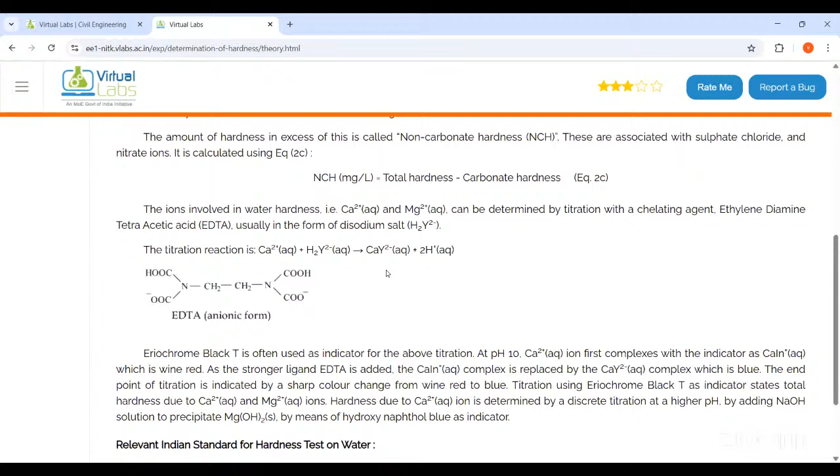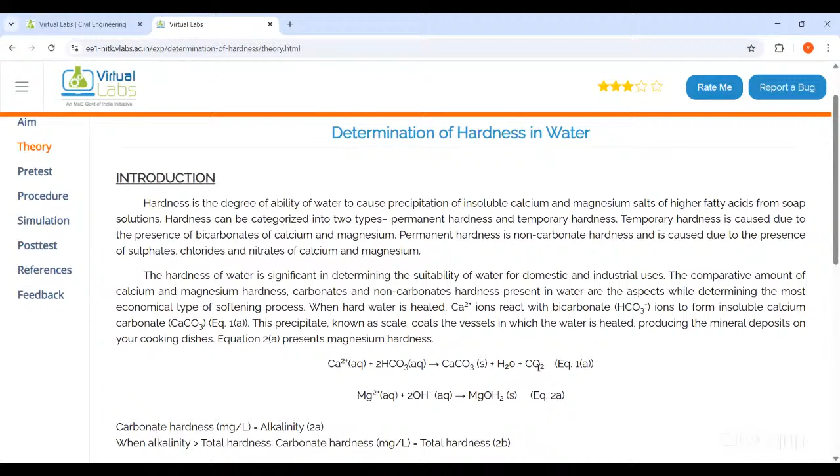Theory explains what hardness is. Usually there are two types: permanent hardness and temporary hardness. Temporary hardness we can remove by boiling the water, whereas permanent hardness requires other methods. These are the reactions involved during this titration method. What is the name of EDTA? Why do we use Eriochrome Black T as an indicator for this experiment? We also use a specific IS code for this experiment. Theory explains about hardness, types of hardness, and reactions involved during the experiment.

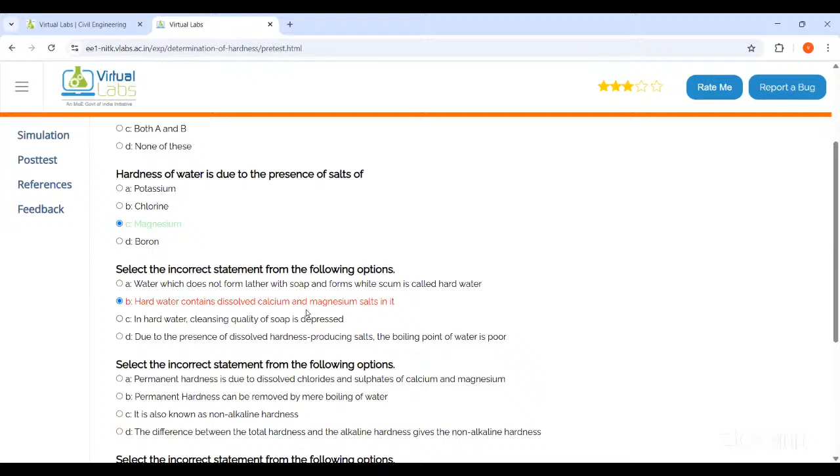Next is the pretest. Based on the theory, there are some multiple choice questions. Students have to answer these and then submit. Their score appears here, correct answers appear in green color, and wrong answers appear in red color.

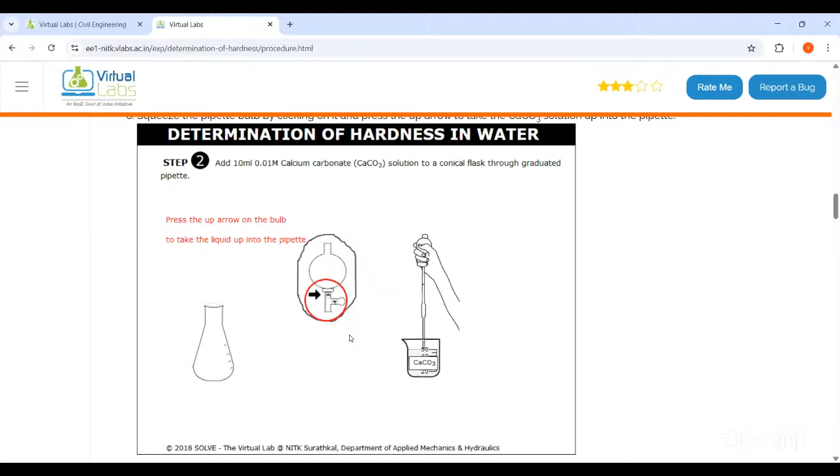Next is procedure. These procedure steps will be followed on the simulator - how to arrange the experiment, what solutions we are using, everything is explained in this procedure part, along with calculations and how to make the tabular column.

Next is the simulation part, which is same as how we do the experiment in the lab. First is the objective or aim: to determine the amount of total hardness present in a given water sample by EDTA titration method. Apparatus used includes pipettes, conical flask, burette, beaker, dropper, etc. Solutions used are ethylene diamine tetraacetic acid, known as EDTA solution, water sample, calcium carbonate solution, ammonia buffer solution, and Eriochrome Black T as indicator.

The description is about the hardness of water. Hardness is defined as a measure of the ability of water to cause precipitation of insoluble calcium and magnesium salts of higher fatty acids from soap solutions. There are two types of hardness: temporary and permanent. Temporary hardness is the presence of bicarbonates of calcium and magnesium. Permanent hardness is the presence of sulfates, chlorides, and nitrates of calcium and magnesium.

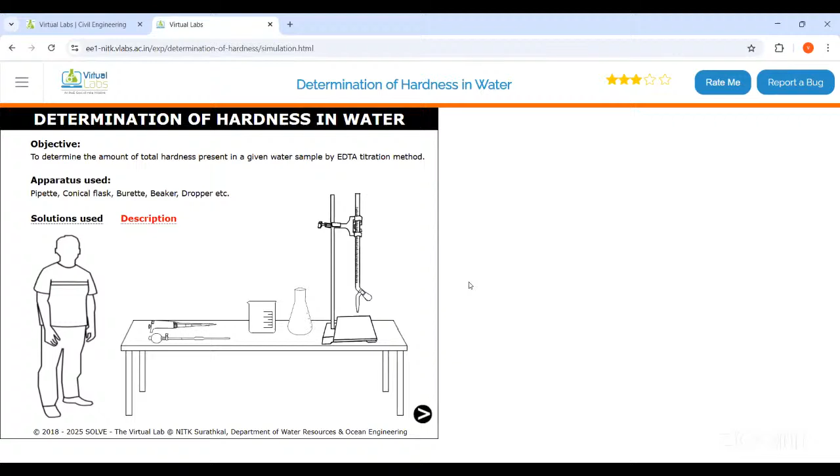This is the setup of the instruments, which are used for this particular experiment. First, we have to do standardization of the EDTA solution. In any experiment, standardization of the solution is important first. So let's see how to do the standardization of EDTA solution.

First, we take EDTA solution in the burette using a funnel. Pour the EDTA solution into the burette up to the 0 mark, close the bottle. The solution level is up to 0, but the measurement is at the lower meniscus. One more important thing - you have to remove the funnel. Sometimes students forget to remove the funnel and do the titration like that. So you should give the instruction that the funnel should be removed from the burette.

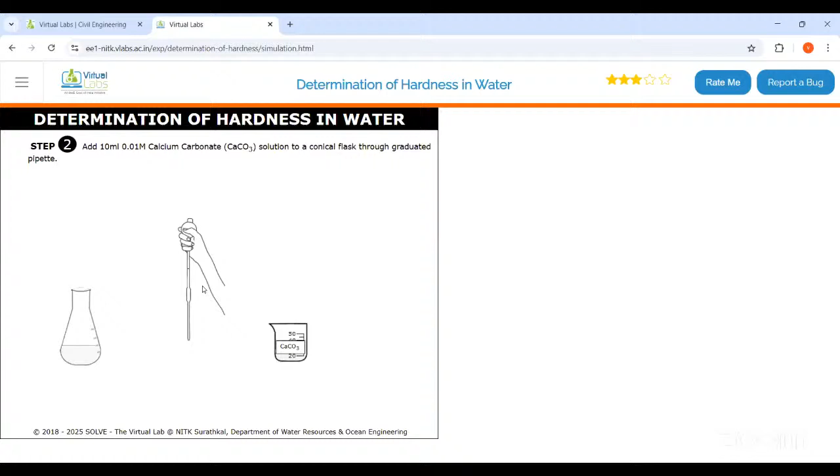Next, we add 10 ml of 0.01 M calcium carbonate solution to a conical flask through a graduated pipette. Click this button to fill the solution in the pipette, and click the down arrow button to release the solution. Next, we add ammonia buffer solution to remove the interference of particles - 1 ml of ammonia buffer solution to the conical flask.

Meanwhile, there are a few viva questions that will appear during this experiment. Why is ammonia buffer solution added to the sample? It is to remove interference and also to maintain constant pH. Next, we add 3 to 4 drops of Eriochrome Black T indicator.

After adding the indicator, the solution color turns to brick red or wine red. Now titrate this solution again with EDTA solution.

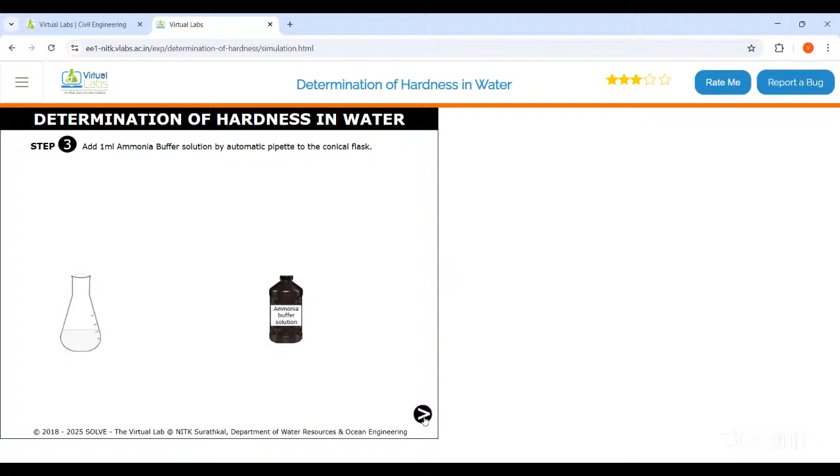After that, add the indicator, Eriochrome Black T, 3 to 4 drops. After adding the indicator, the solution color turns to wine red or brick red.

Now titrate the EDTA solution till the color changes to blue. To start the titration, open this knob, and continue titration until the color changes to blue, then stop by closing the knob.

Note down the final burette reading. Here is one of the simplest viva questions: titration is carried out until the sample changes its color from wine red or brick red to blue.

Now make the tabular column and note down all the observed values. We find total hardness using the formula A into B into 1000 divided by C, where A, B, and C are all explained.

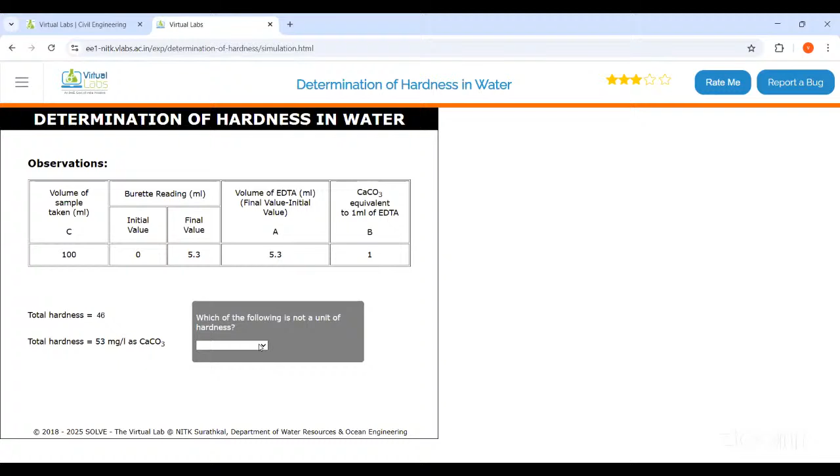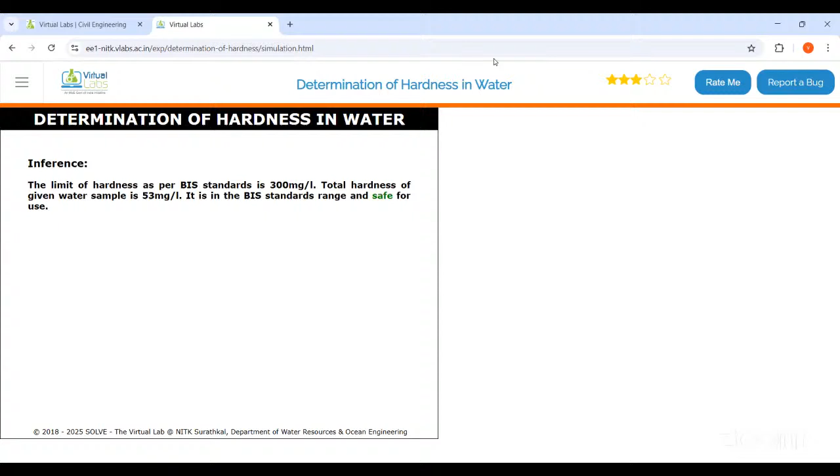The limit of hardness as per BIS standard is 300 milligram per liter - that is true. So the inference is: the limit of hardness as per BIS standard is 300 milligram per liter, and the total hardness of the given water sample is 53 milligram per liter, so we can use it, since it is within the safe range.

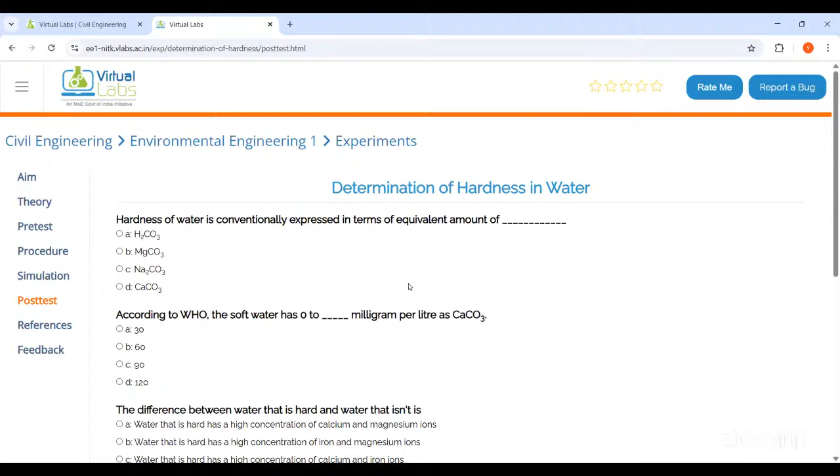After the simulation, again post-test questions are there, which are a little more advanced than the pre-test questions. Students have to answer, click the right answer, and submit using this link. The correct answer appears in green and the wrong answer appears in red.

Next are the references. There are two links: one is simulation demo and the other is experimental demo.

The simulation demo is the same as what I showed in this part, but it has voice narration. The experimental demo shows how we can actually do it, so that students understand it better.

These are the references and the contributors list. Again, the feedback section - after using this, you can share your suggestions so that we can improve it.

Similarly, another important lab in civil engineering is the transportation engineering lab. Here also there is introduction, objective, list of experiments, and target audience. Total 8 experiments are there, and this lab is useful to both UG, PG, as well as diploma students.

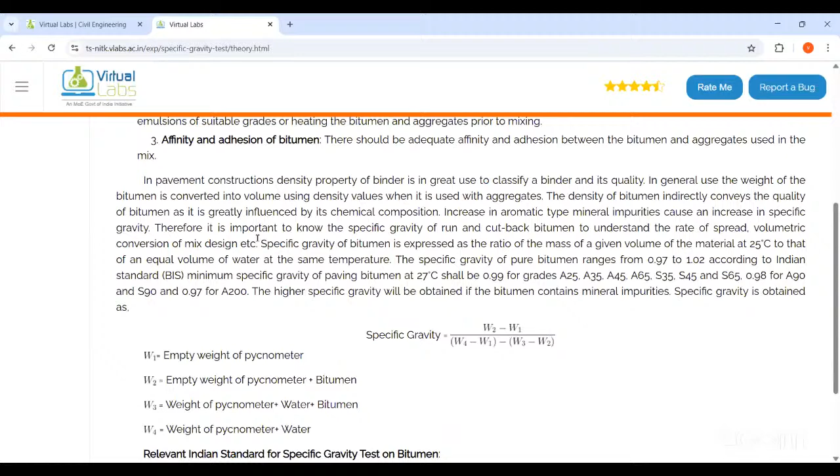These are the specific properties, and also how to calculate the specific gravity using this formula, where W1, W2, W3, and W4 are all explained. For this, we used this Indian Standard Code Book.

After explaining the theory, there are a few multiple choice questions which the students have to answer. Next is the procedure - these procedure steps will be followed on the simulator.

Next one is simulation. This is one of the simplest experiments. The objective or aim is to determine the specific gravity of the given sample of bitumen.

Apparatus used: specific gravity bottle, also known as pycnometer, weighing balance, and distilled water. Specific gravity of bitumen is defined by Bureau of Indian Standard as the ratio of the mass of a given volume of the bituminous material to the mass of an equal volume of water, with temperature of both specified as 27 degrees centigrade.

This is the setup. First, we take a clean and dried specific gravity bottle, weighed along with stopper, that is W1. Now we turn on the weighing balance and make it zero by clicking this tare button. Then keep the specific gravity bottle on the weighing balance and it shows the weight of the bottle, that is W1.

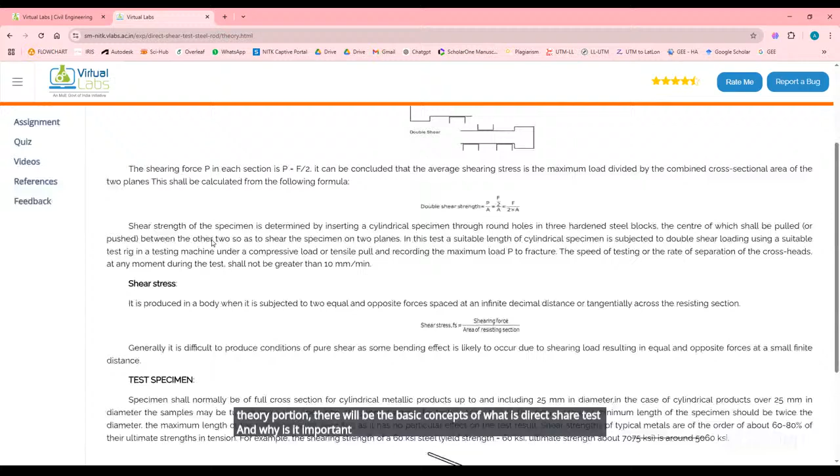As already explained, we have the theory portion, which covers the basic concepts of what direct shear test is and why it is important, along with any IS codes that we have to refer to.

Next, moving on, we have the procedure tab. This is a familiarization tool so that people completely new to this web page get a good idea of what they have to perform inside the simulator. As you move down, you will be shown the various steps you have to follow in order to move forward in the simulation.

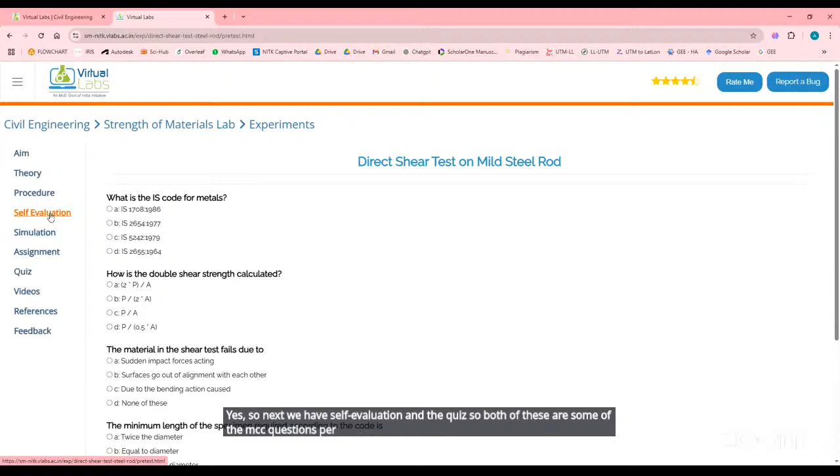Next we have self-evaluation and quiz. Both of these contain MCQ questions pertaining to the particular experiment in question, so here all the questions will be related to the direct shear test concept itself. Students can answer these questions to gain more knowledge and get an idea of their level of understanding of the subject.

Next, here we have our simulation window. I've already spoken about the quiz and self-evaluation. So next, one more important feature of this VLab is...

We have something called the experimental demo video and simulation demo video. These are videos developed under Lagu paTa, an initiative by CST and NIT Surathkal. Along with the procedure tab, which has a pictorial representation of how the simulation is going to look and how you will perform the experiment, in the videos tab we have two demo videos.

One is the simulation demo video, which gives a detailed video description of how this particular experiment has to be conducted. We also have an experimental demo video, so if the student wants to know the practicality of the experiment, or look into how to actually conduct it in a physical laboratory, they can look into these demo videos.

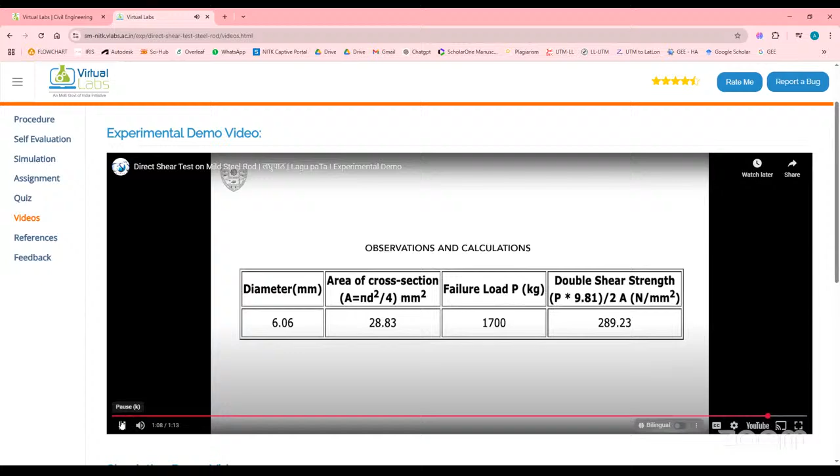Let's look into both of these videos to get a better idea. So if I just click on it, the video will play, showing each and every step that we have to follow. So this is the experimental demo video.

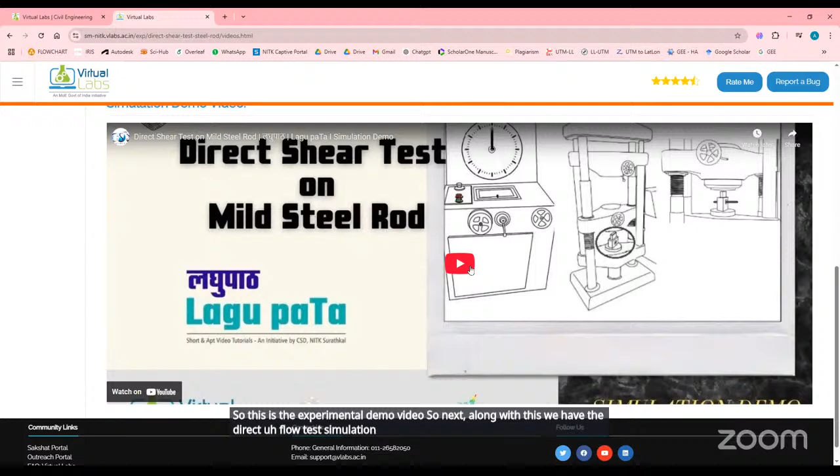Next, along with this, we have the direct shear test simulation demo video as well. Let's quickly look into that too. Just by looking at this video, we'll get a pretty good idea of what we have to do in the simulation.

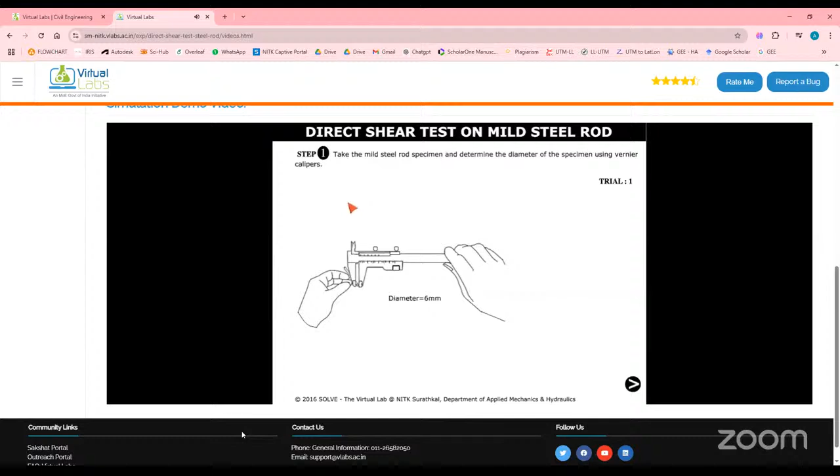After the setup is done, we have to click on the next button and start the experiment. Wait until the specimen fails, note down the failure load, and stop the experiment. That is for trial 1. Similarly, we'll have to do 2 more trials for the same experiment.

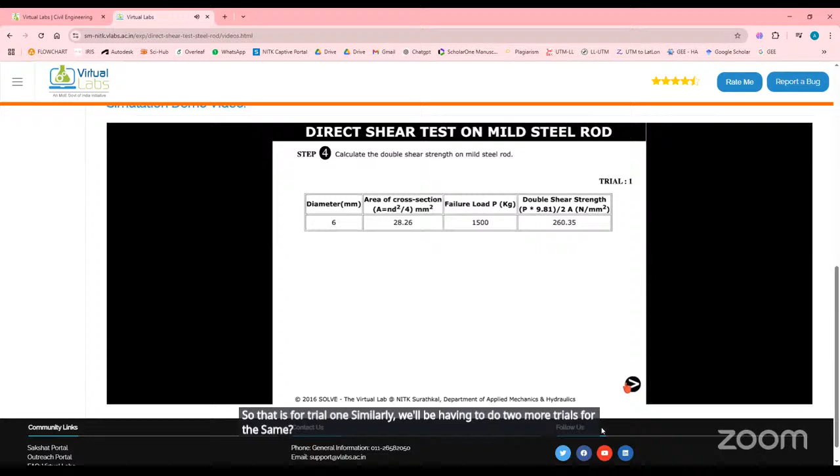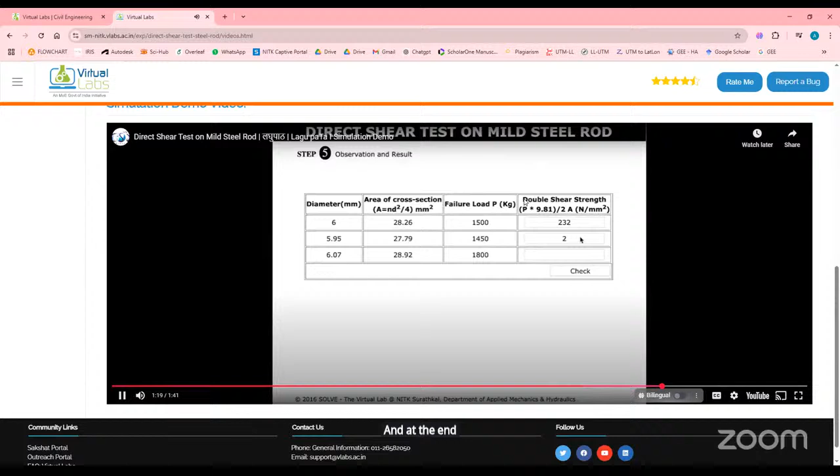When you click on the next button, we'll get 2 more trials of the same kind. At the end, after the 3 trials, we'll have to calculate the different double shear strength values. That is the complete experiment we will be doing in the simulator.

Now let's directly move on to the simulation. Once I click onto the simulation, all the other parameters of the web page get hidden so that all concentration goes onto the conduction of the experiment. First we will be shown what the objective is and what apparatus are used.

So now, even inside the simulator, we will be having some guidelines which will help us to do the simulation.

Here we have a written guideline telling me to take the mild steel rod specimen and determine the diameter using the vernier calipers. I can see I have a vernier caliper and they have also provided a rod, the mild steel rod specimen. There is a guiding arrow telling me that I have to click on this particular point.

When I hover over the specimen, my cursor changes to a hand icon, which tells me that this is the correct place to work on. Any other place I click is not going to work, other than simply clicking on the specimen rod.

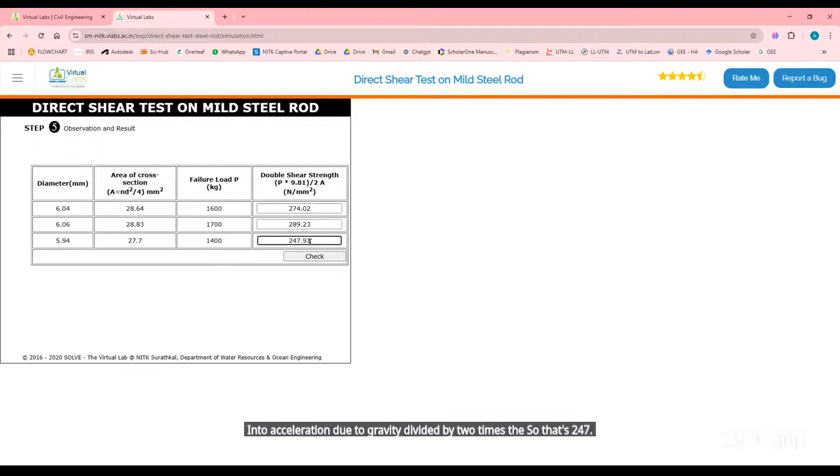So that's 289.23 and 247.91. Let's see if the values I calculated are correct or not. Okay, so now we can see there is no percentage of error. So here also the students can understand if they are going wrong in any part of the calculation.

So if there is any mistake, they'll be able to find out the percentage of error that I have conducted. And then finally, what is the average double shear strength? That is the average of all the 3 values taken in the experiment. So that's about the simulation part of this particular experiment.

I hope you're able to understand the importance of virtual labs in this situation. Most students, by the end of the semester, will not be able to completely recollect the way to conduct the experiment, or there will be many practical problems allowing students to get into laboratories and conduct these experiments. Instead, students can always come onto this platform, look into the experiments, and get a better idea of how this experiment works and what steps are needed to understand the concept.

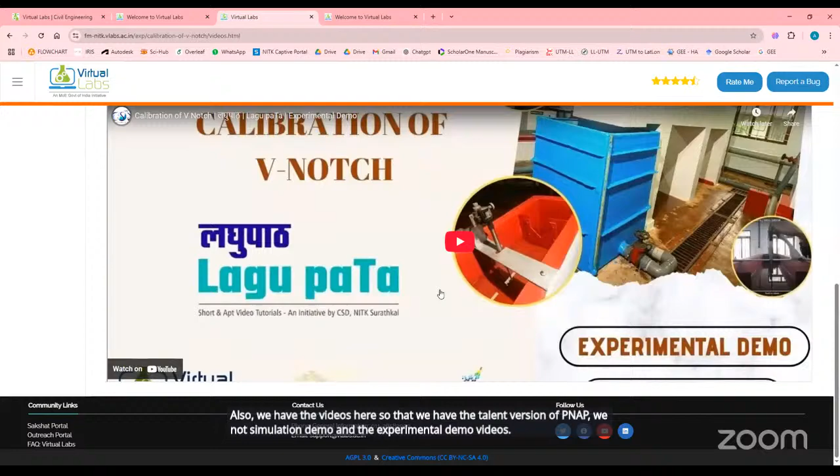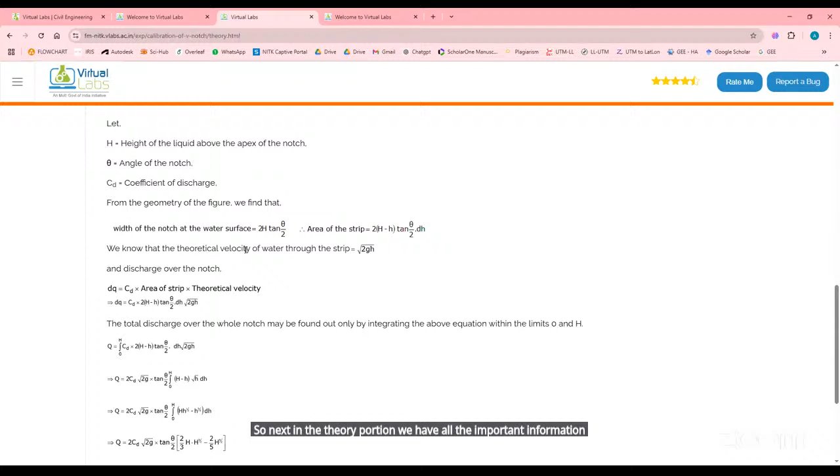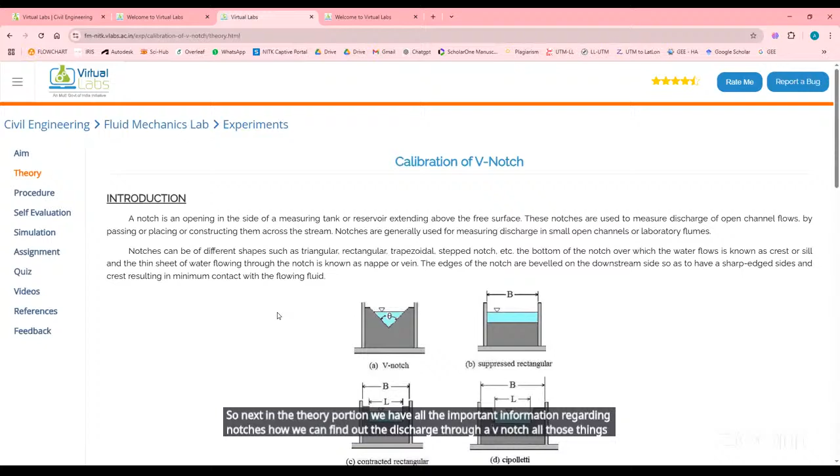So now let's dive in. In the theory portion, we have all the important information regarding notches and how we can find the discharge through a V notch. All those things have been mentioned here. Again, in the procedure, we also have the pictorial representation.

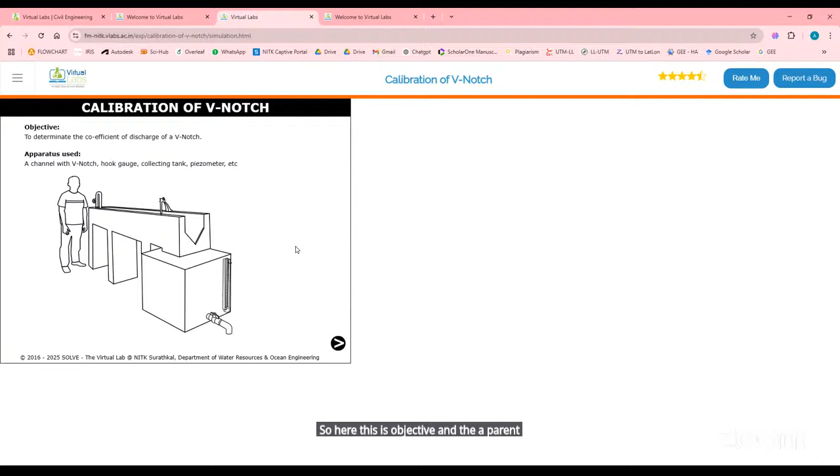Now let's conduct the experiment of calibration of the V notch. Here is the objective and the apparatus used. Now here also we have written guidelines telling us what we have to do in the various stages of the experiment. First we have to start the machine and move on to the next step.

Now we have to open the inlet valve and allow the water to fill into the channel till the crest level. The crest level is nothing but the bottommost point of the V notch. Let's do that and move forward.

Now we have to find the total head of water to get the theoretical discharge of the V notch. Here we have 10.04 minus 3.15 centimeter, so that's 6.89. Let's check if it's correct. Okay, now we have the theoretical discharge value.

What we have to calculate is 8 by 15 root of 2g into tan theta by 2 into h to the power 5 by 2. The parameters to substitute are acceleration due to gravity as 981 and theta as 90 degrees. As theta is 90, theta by 2 will be 45, and tan 45 will equal 1. H is the head of water, that is 6.89 to the power 5 by 2, which is 2.5. Then we have to substitute this value. For the time being, I'll add some arbitrary value and let's check.

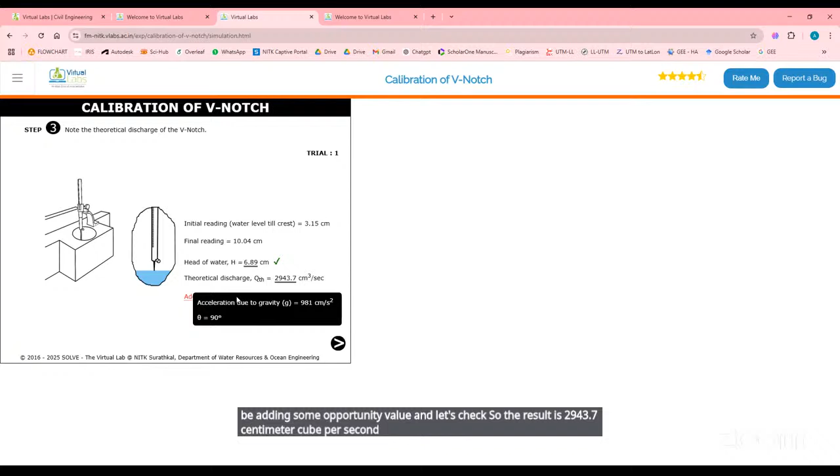Now similarly, we'll move forward and find out what is the actual discharge. Why are we finding this? We are finding theoretical discharge and actual discharge to find out the coefficient of discharge for this particular notch. So we'll be noting down the time required to fill 10 centimeter.

So here we have area of the tank as 3500, into h is 10 centimeters, divided by time taken which is 20. So here it's 1750. Let's check it. That is right.

We'll move forward. So now here, these are the observations. And now we have to find out what is the coefficient of discharge. So coefficient of discharge is nothing but Q actual divided by Q theoretical.

So that is 1750 divided by 2943.7, and the value comes out to be 0.59. Let's check it, and that's right. So this is for trial 1.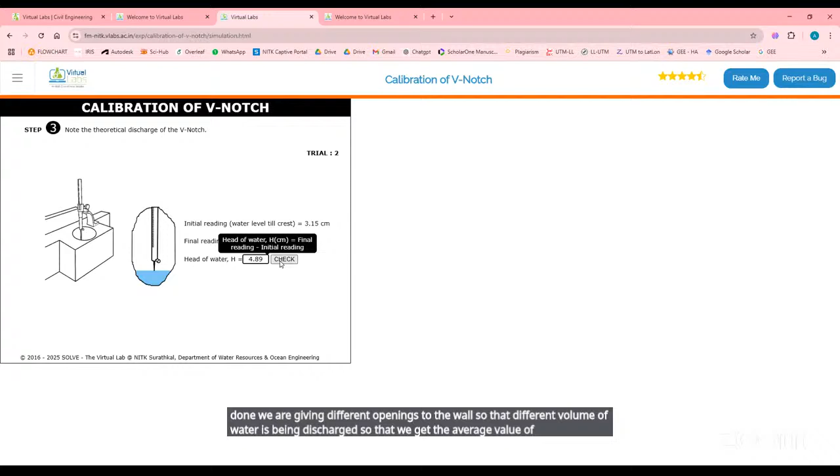The same steps have to be followed for trial 2 as well. So we'll be noting down the head of water that we are providing. This is done so that we give different openings to the valve, so that different volumes of water are discharged and we get the average value of coefficient of discharge. So again, now we have to find out what is theoretical.

So what we have found is H equals 4.89. 4.89 to the power 5 by 2, that is 2.5. Into what are the other parameters? Into 8, divided by 15 into root of 2 into 981.

So now again we'll be calculating the actual discharge. Here we have area of the tank 3500 into height of water is 10, divided by the time taken is 44.6. So here, 784.75. Let's check it. Yeah, 784.7 is the correct value.

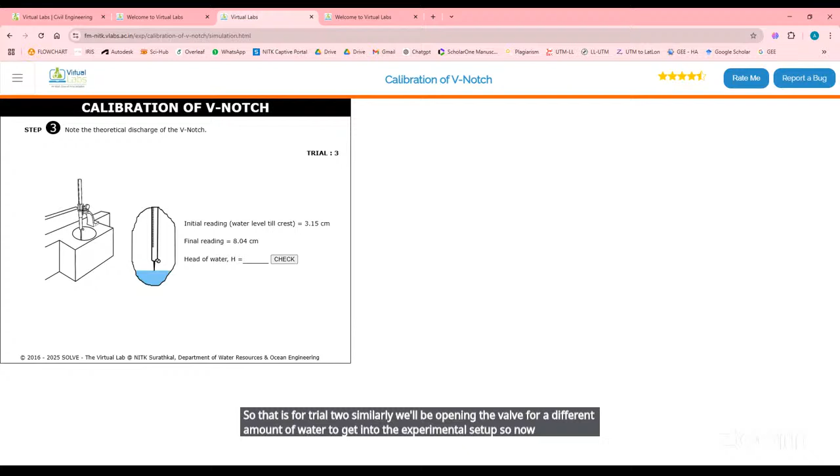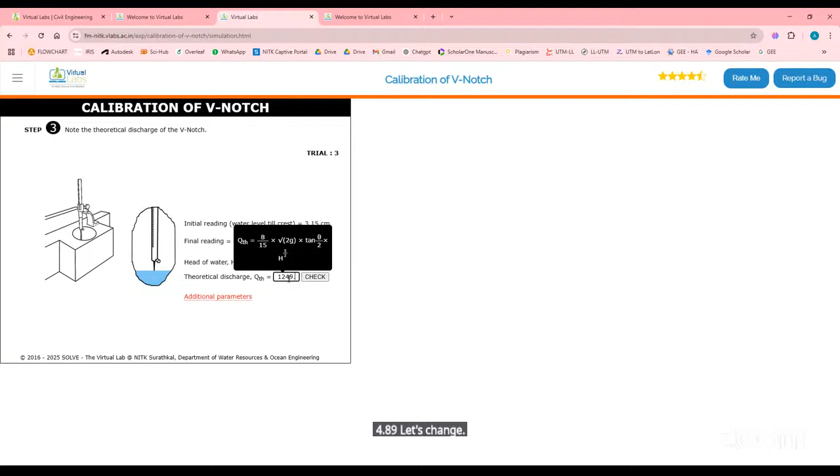Similarly, we'll be opening the valve for a different amount of water to get into the experimental setup. So now final reading is 8.04, so that's again 4.89. Q theoretical will be 1249.1. And now again, what is the time required to fill it for 10 centimeter height? 6.

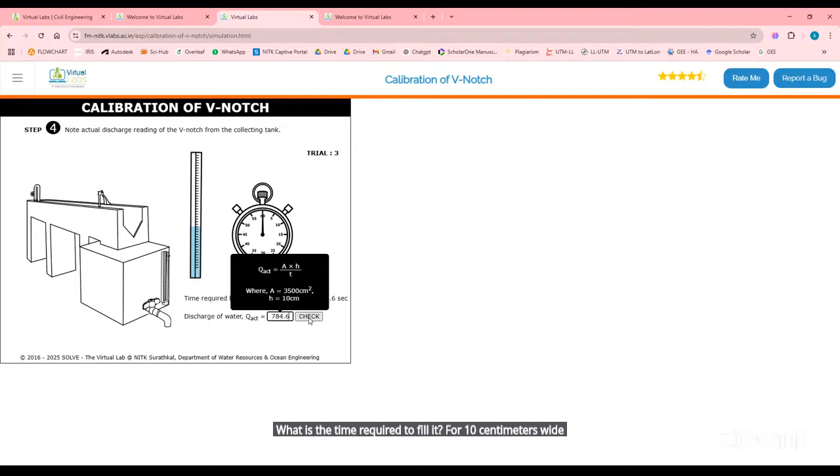So now again we have to find out Q actual by Q theoretical, that is coefficient of discharge, 0.62. And check it, yes. So now we have done the 3 trials, so now we'll stop.

So again, in the references section, you'll be having what textbooks or journals have been referred to for the development of this lab, and also the contributors list. So now moving forward.

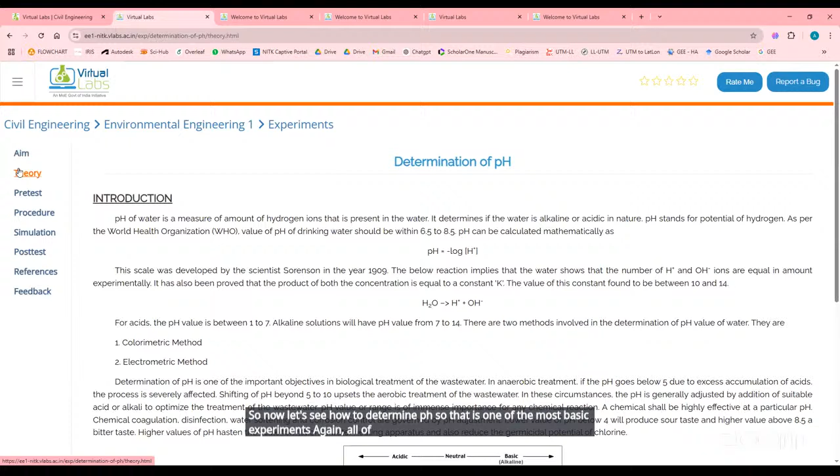So now let's see how to determine pH. That is one of the most basic experiments. So again, all of the parameters are the same. There is theory. Something in the older labs was they had something called self-evaluation, but now that has been renamed as pre-test and post-test. Though the major goal of the pre-test and post-test remains the same.

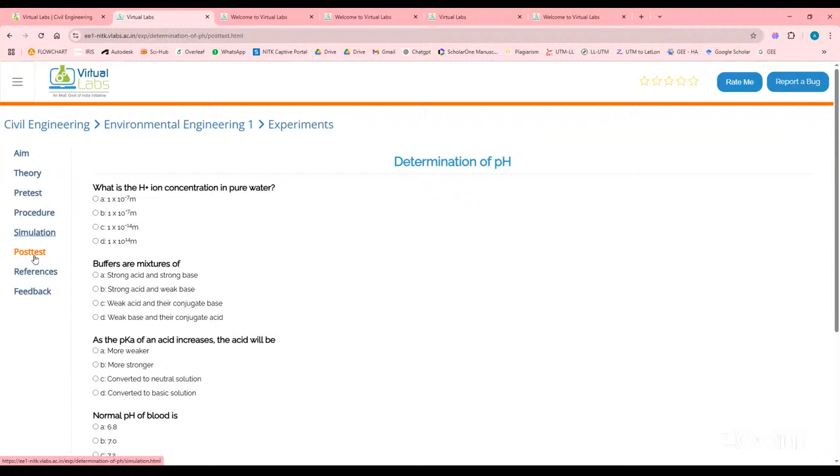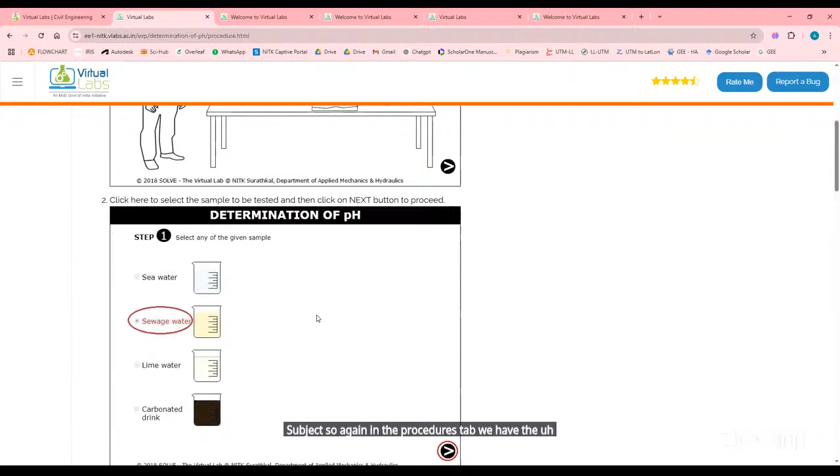So the students can answer these questions and get a better knowledge regarding their subject. So again, in the procedures tab, we have the pictorial representation of what we have to do inside the experiment.

So now let's move on to the simulation.

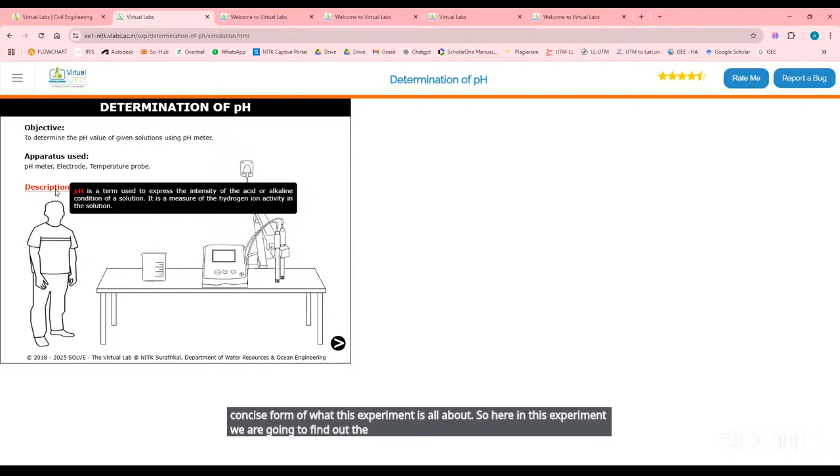But in the description tab, we have a very concise form of what this experiment is all about. So in this experiment, we are going to find out the pH, and it's telling us what pH is - a measure of hydrogen ion activity in any solution we are considering. So that's about the introductory page.

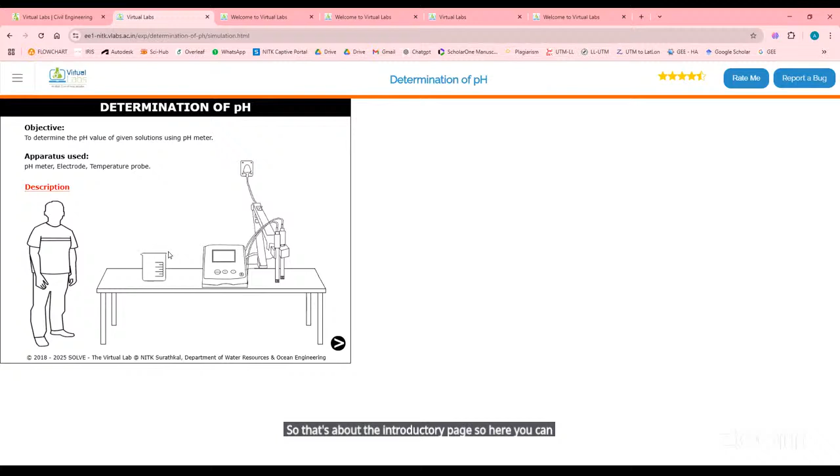Here you can look into the pH meter, the beaker, and the experimental setup. So first we have to select any one of the given samples. Let's select seawater and see how the alkalinity test, the pH test, has to be conducted.

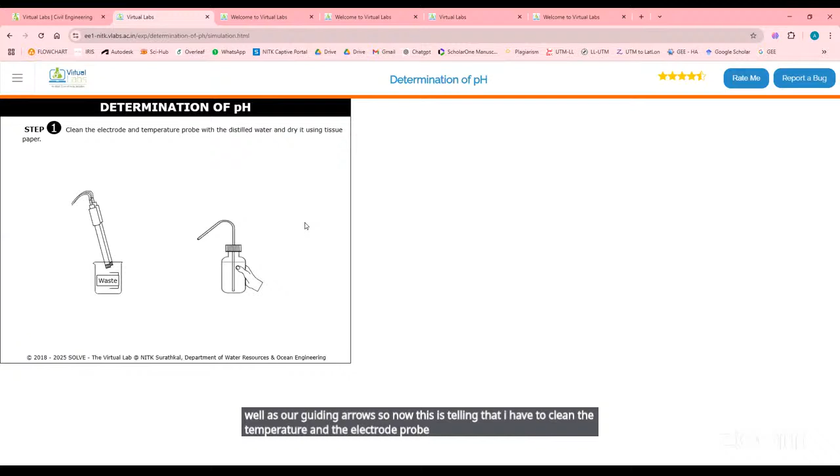Before finding out the pH of the required sample, we have to first calibrate the pH meter, following the same procedure. Inside the simulation, we have written guidelines as well as guiding arrows. This tells me to clean the temperature and electrode probe with distilled water and dry it using tissue paper. So this is my instruction - I'll click on the distilled water bottle and clean it.

Now it is cleaned with distilled water. Now we have to dry it with the tissue paper. When I give OK, this particular command will be executed. Okay, so now a pop-up question has come up on the screen.

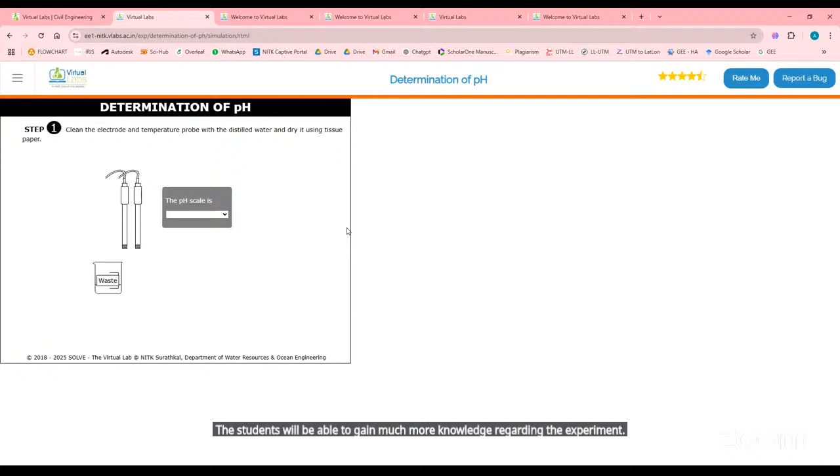These are called formative questions. In the newer labs, based on our experience and feedback, we have added these formative questions. The main idea of including formative questions is to make the simulation more interactive with students, and at the same time, students will gain much more knowledge about the experiment while conducting it. So without answering these formative questions, you will not be able to move forward in the simulation.

So for the pH scale, I have 4 options: is it a linear scale, an exponential scale, a logarithmic scale, or none of the above? If we had looked into the theory portion, we would have gotten the answer to this - it's a logarithmic scale. Okay, so now it allows me to move forward in the simulation.

Moving forward, the second step in calibration of the pH meter is to dip the electrode and temperature probe in buffer solution of pH value 7. We turn on the machine and dip our probes. Here the basic idea is we are going to give a buffer solution that is equal to or more than 7, and one more will be less than 7.

So another formative question has come up, and I have to answer this in order to move forward. Buffer solutions are used to calibrate pH meters because they resist changes in the pH. So that is true.

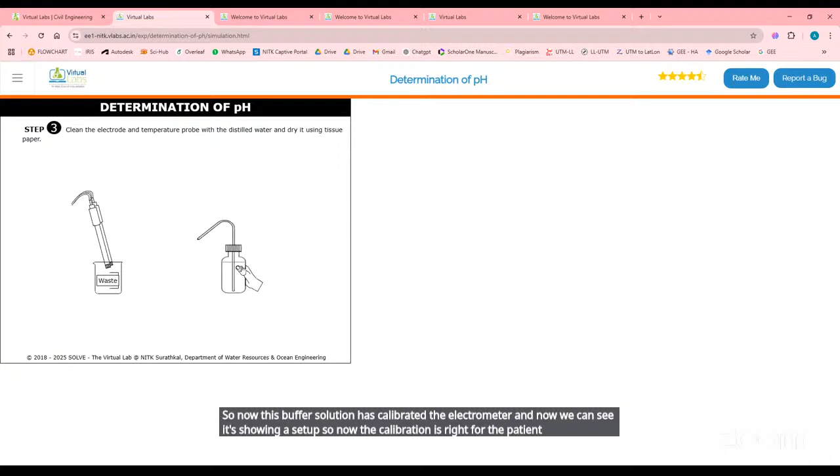Now this buffer solution has calibrated the pH meter, and now we can see it showing as 7. So the calibration is right for the pH buffer solution of pH 7. Now we again have to clean our electrode and temperature probe. Why is this done for each and every step? This is to make sure there is no discrepancy in the later values we are going to find out.

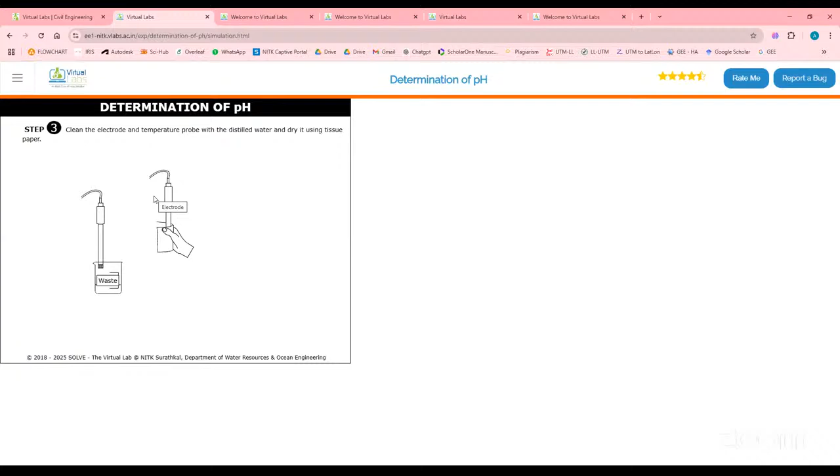So now we have another formative question. I hope you all understand that with the inclusion of formative questions, the simulation has become much more interactive with the students. So pH is a measure of hydrogen ions, oxygen ions, hydroxide, or carbonate - it's a measure of hydrogen ion.

So with this, we will be moving forward to the next step. Now we'll be placing a buffer solution of pH 4 and dipping our probes. Okay, so now the pH meter has been calibrated.

So that is done. Now we have to determine the pH value of the sample. So again, what we have to do is clean our probes - after each and every reading, this is the standard procedure we have to follow.

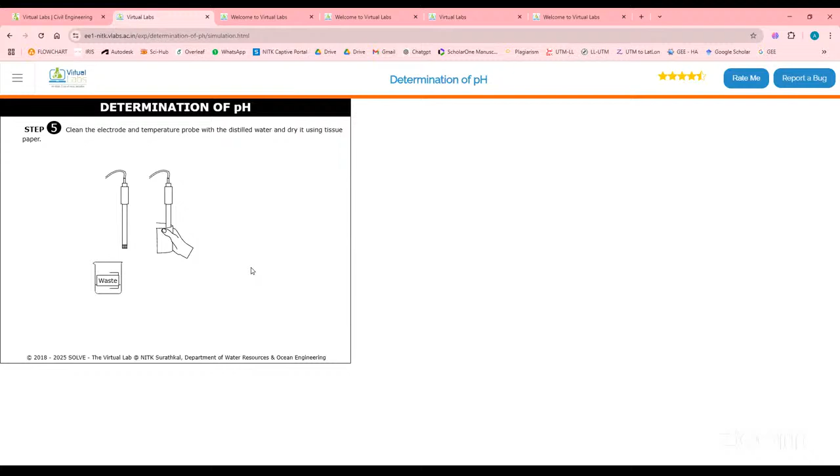So again, we have another formative question: what is the neutral value of the pH scale? That's 7.

Now moving forward, in step 1 we had selected our sample as seawater. So now we will be finding out what is the pH value for this sample. The pH of seawater has come out to be 8.3.

Now we have to answer this question: if the pH of seawater is 8.3, is it alkaline, neutral, or acidic? Whatever value is above 7 is taken as alkaline or basic. So the inference we'll arrive at is that if the pH is less than 7, it's acidic; if it's equal to 7, it's neutral; and if it's greater than 7, it's basic or alkaline in nature.

Yes, so that's about the experimental simulation for this particular experiment.

So again, we have another newer lab, that is advanced remote sensing and GIS. Most civil engineering students will not have much exposure to advanced remote sensing and GIS applications, so they can look into the various experiments provided here and get a very good idea of how these technological advancements are being used and how they can stay up to date.

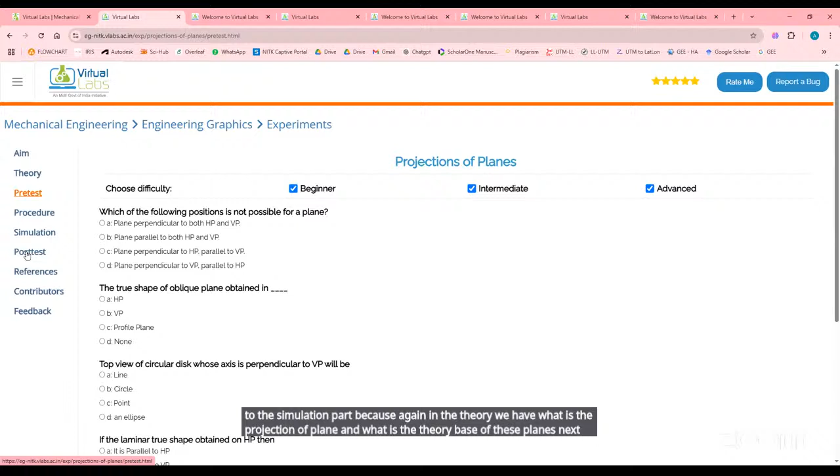Next, we have some pre-test and post-test questions regarding the plane topic itself. In the procedures tab, we have a detailed explanation of how each step is to be done, so let's see how we'll do this in the experiment. Then in the references tab, we have the references and the contributors list.

Now we'll move on to the simulation. What is our objective? The objective is to draw the projections of a pentagon of 25 mm side, having the surface inclined at 30 degrees to the horizontal plane with the side parallel to HP, and inclined at an angle of 60 degrees to the vertical plane. These are the three main values to remember: the side of the regular pentagon is 25 mm, the surface inclination to HP is 30 degrees, and to VP is 60 degrees. That is the main objective.

These are the apparatus we'll be using, and now we will move on to how we will conduct this experiment. The type of projection discussed here is related to the planes, so we have to answer this and draw our axis — here is our XY axis.

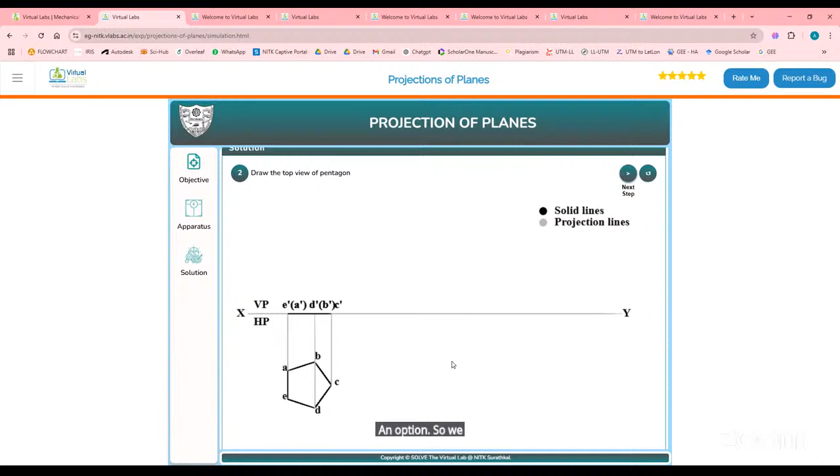Once this is done, we move to the next step. What is the inclination angle to HP? This was given in the question as 30 degrees. So we'll plot the inclined line, and on it we will place E dash, A dash, D dash, B dash, C dash.

Now, what is the color of the projection line? Here we can see the solid lines are in black and the projection lines are in gray. So just click on the right option.

Now we'll be projecting whatever is there on this VP inclined line to the horizontal plane. So now we have brought it back to the horizontal plane. We'll move on to the next step.

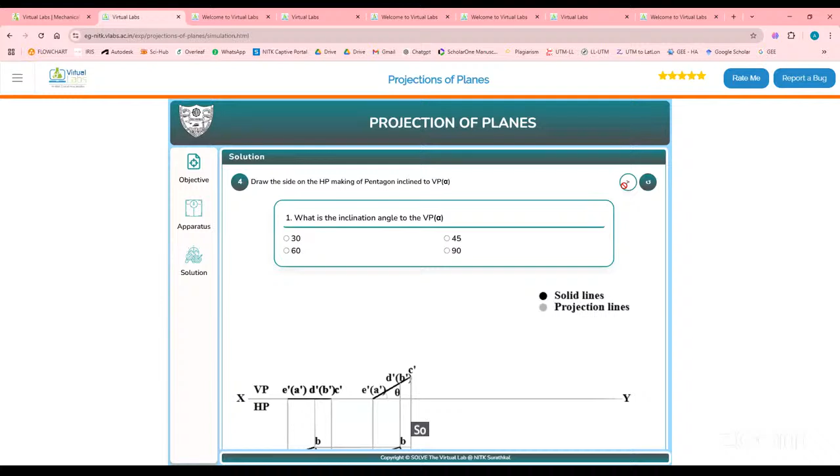What is the inclination of angle to VP? That's 60 degrees, which was given in the question. So we'll plot the side, and then we will transfer these points to this inclined line.

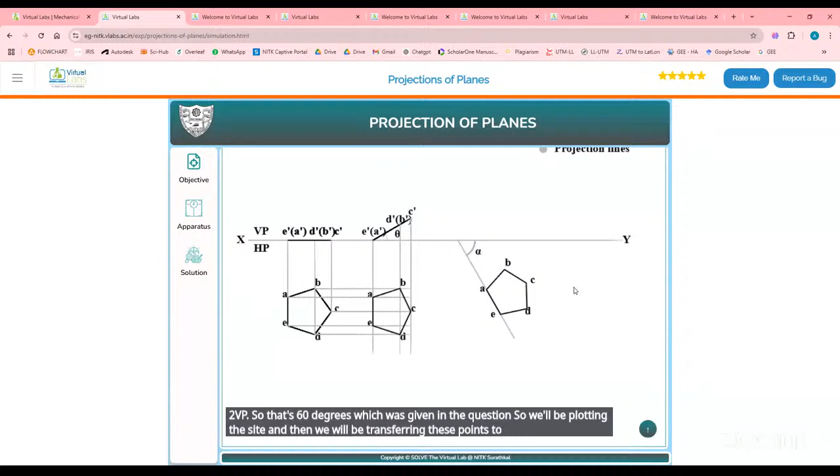And the next step, what are we doing? The top view, correct? The top view will be on the horizontal plane. So we will be projecting this plane up and bringing it here. So here is the front view.

So if a 25 mm side of pentagon is inclined at 30 degrees to the horizontal plane and 60 degrees to the vertical plane, this will be the front view and the top view that we get from this particular question. So the students can also get a very good idea of how they have to move forward in drawing these projections.

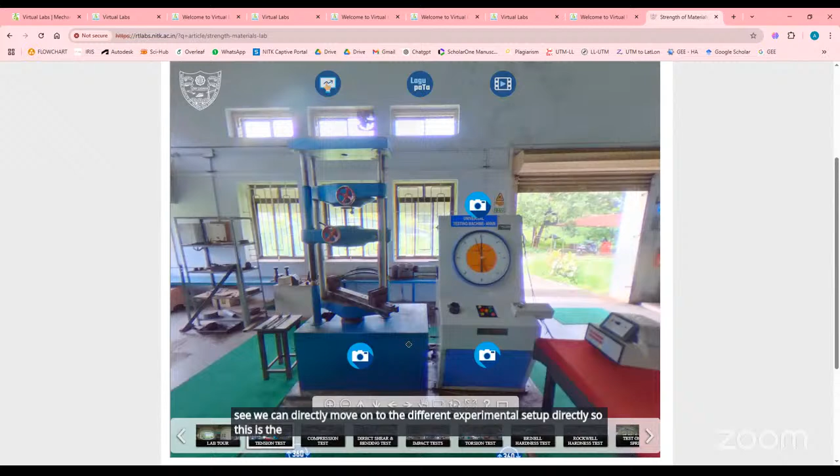So here is the lab that is there in NITK. When we scroll down, we can also directly move on to the different experimental setups. So this is the UTM machine.

Then we can go on to the direct shear test and bending test machine. This is the experimental setup that we had used for conducting our direct shear test experiment. And then we have the various impact test machines as well.

Along with this, you can also look around the laboratory in this manner. We can also directly go on to the different machines as well. Here again we have a high resolution image of this experimental setup.

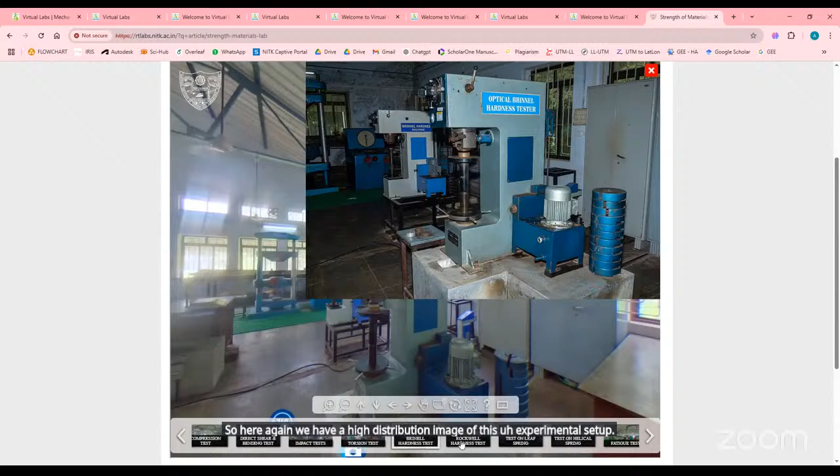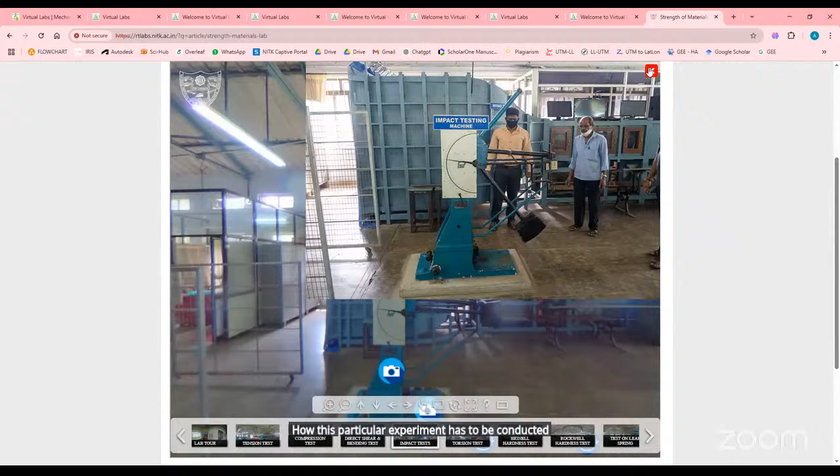So again, even in the impact testing, we have different options of how this particular experiment has to be conducted. And with this we have the instrument setup as well.

So similarly, you can move around and have a look at the various experimental setups. And again, we can look into the fluid mechanics lab as well.

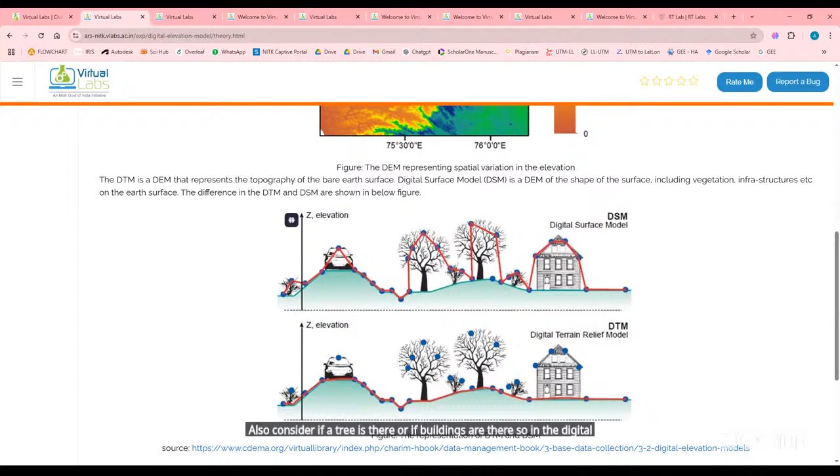So the DEM, in them again we have two types, that is DTM and DSM. DTM provides the features of only the ground. But DSM, that is digital surface model, also provides any extra things present on the ground. So if a car is there, then that one's height is also considered. If a tree is there, or if buildings are there. So in the digital surface model, all these data points will be available, but in the digital terrain model, only the ground features will be provided. So that is about DTM and DSM in the theory portion.

So again we have something as pretest, post-test, so that's the same things. And then in the reference section, you'll be having different reference material. In future, as this is a very new lab that has been introduced to VLab, the simulation demo and the experimental demo videos are yet to be up, but they will be uploaded very soon.

So let's move on to the simulation. Here the objective is to extract the topographical features and delineate watershed from the Shuttle Radar Topographic Mission data, that is the SRTM data. SRTM is nothing but a satellite that is providing this particular data. There are different satellite ranges as well, so you have SRTM, we have Landsat, we have different kinds of Landsat satellite data as well.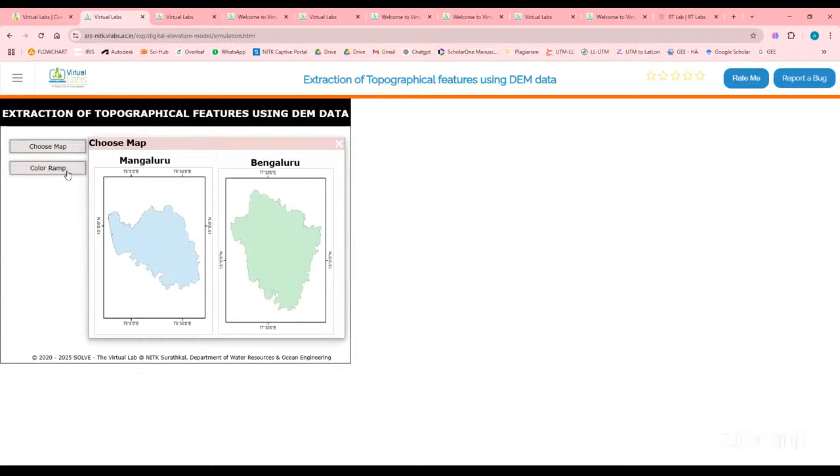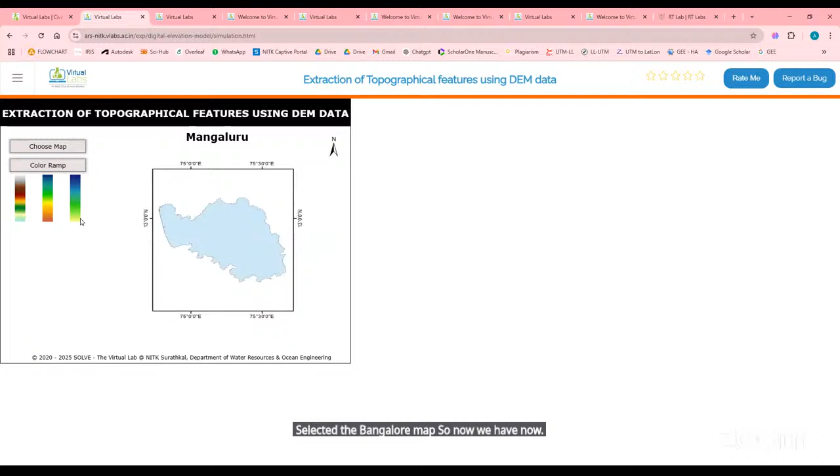So now here we'll be finding out different topographical features. Let's move forward and first choose the map. Now I have selected the Mangalore map. So now we have color ramp, let's choose this, and we'll click on the image to proceed. We'll take this as classified, or you can take it as stretched - these are the different symbology types, showing how you want to actually showcase your map.

So next we have elevation, we have slope, we have hillshade. Now we'll be doing the watershed delineation, using the elevation data. So this is the aspect. Now coming to watershed delineation, there is something called a stream network.

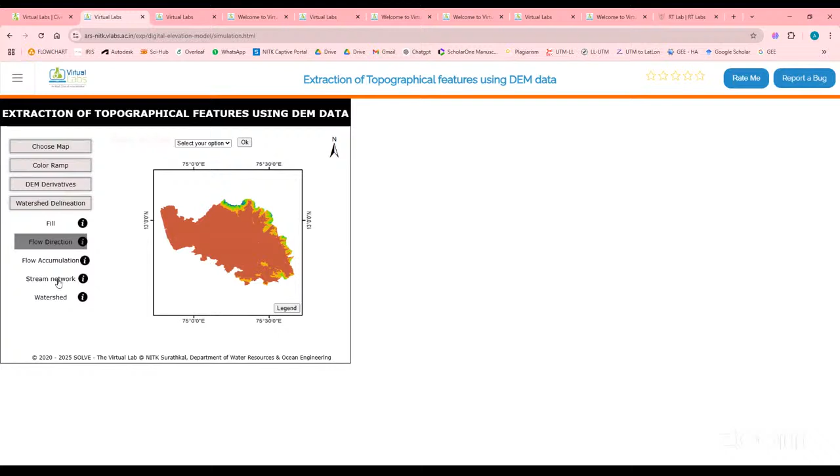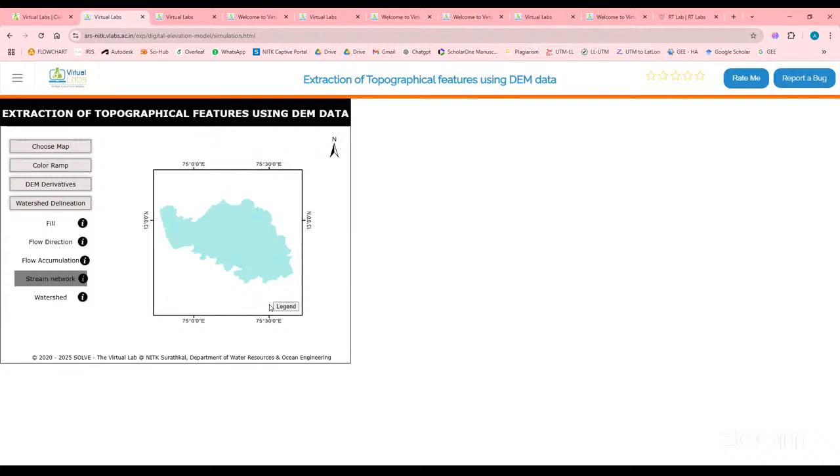Now let's do flow direction, this is the direction of the flow. We can also put in the legend, next, flow accumulation. Next is the stream network - we can tell what the stream network is, the points joining the lowest elevation, where our major river streams will be present.

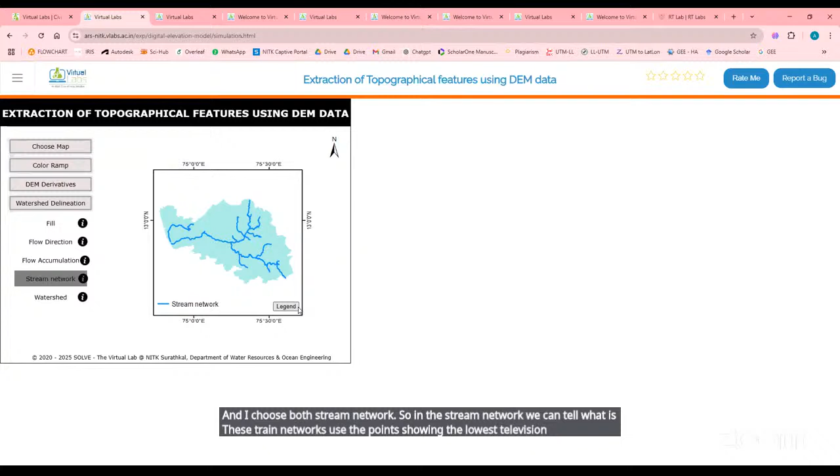Next we have the watershed. For the Mangalore region, we have two basins. Basin 2 is a major basin, and next we have basin 1, which is a smaller one, based on the elevation of the particular area. So that is about extraction of topographical features from the DEM data.

So here we can look into photogrammetry survey as well. We'll directly move on to simulation. Here first we have to unfold the antennas of our controller. So how many rotors are present in an octocopter? That's 8.

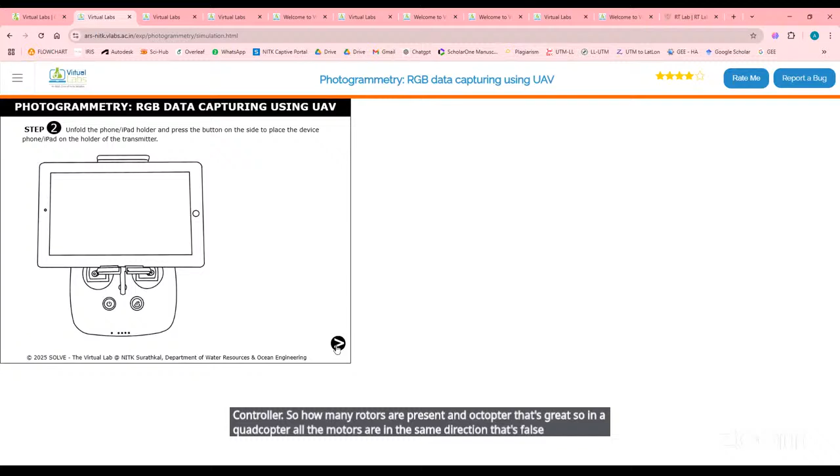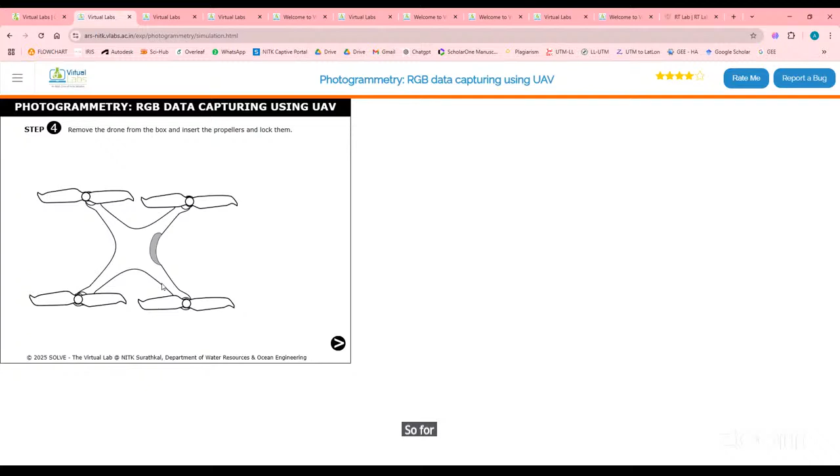In a quadcopter, all the motors are in the same direction - that's false. Now we will be connecting the remote controller and our tab. This is the drone setup, and we will be placing the propellers, 4 propellers onto the quadcopter, and we'll be placing the battery inside this.

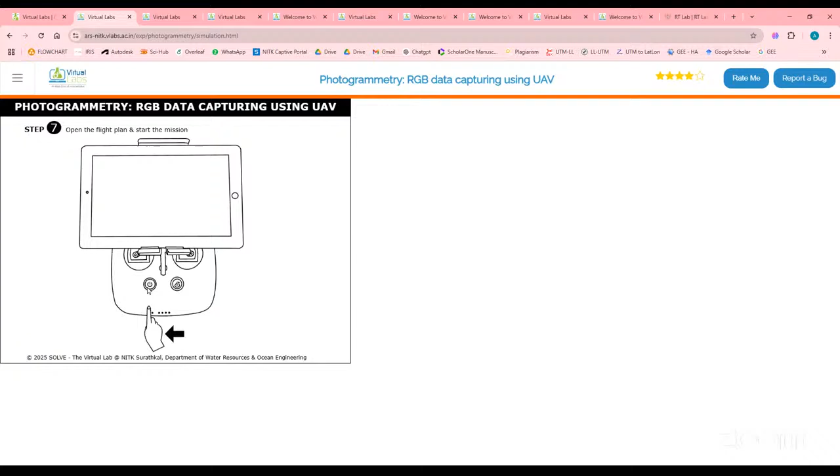So we have to unfold our landing pad, place our drone onto the landing pad, and make the instrument ready. Now next is to create a flight plan and start the mission. We will be flying, and you can choose the flying height. This is the total area that the survey will be conducted. Drone is set up, transmitter is set up, landing pad is placed, and we have also done the iPad work. Now we'll be starting the mission, and the drone will be flying onto this exact path.

To gain the photos - a total of 59 acres will be surveyed within a time of 15 minutes. Now once this is done, the drone will come back to our home position, and then after this we'll have to take out and upload. So now we'll be uploading our images.

So here is the orthomosaic map of this particular area. We also have the digital terrain model, and here it ranges from 6 meters to 12 meters, so it is a relatively flat ground. Now we have the digital surface model as well, so I think you'll be able to understand the difference between digital terrain model and digital surface model. In the digital surface model, you can see the difference is from 6 meters to 27 meters.

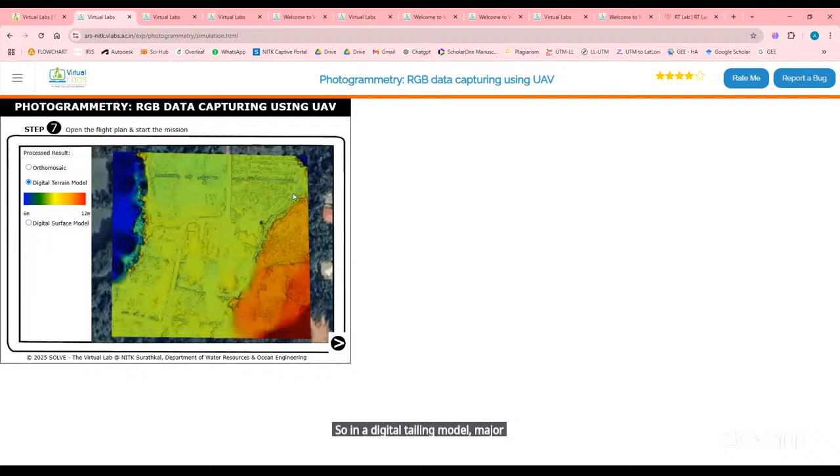The height of the trees, the buildings, if there is any bund or some farming going on, all those portions you can see in a digital surface model, whereas those points are not very much clear in a digital terrain model. So in a digital terrain model, only major ground features will be provided, but in a surface model, all your buildings, tree heights, have all been considered.

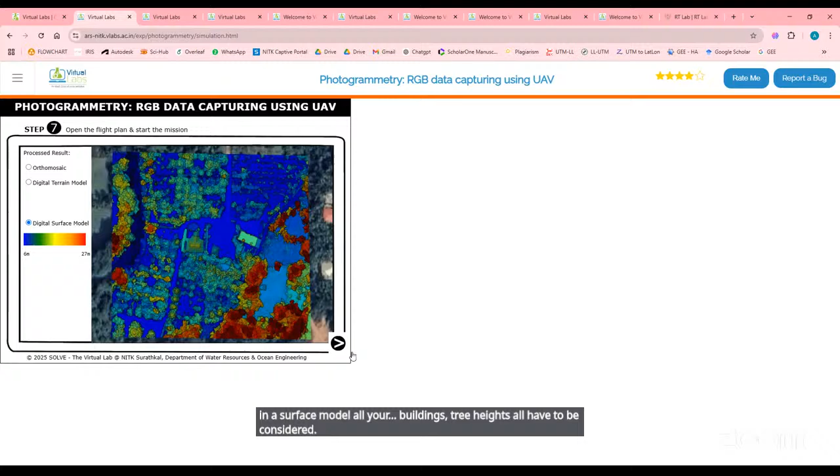Okay, so these are the observations. Depending on the flight height, the resolution of the orthomosaic map will change based on the GSD, that is ground sampling distance. As the flight height increases, we can see our flight time decreases.

Okay, so that's about the photogrammetry survey that we have to conduct.

Here there is also something called front overlap and side overlap. This is the amount of overlap that two successive images have during image capture. If the front overlap and side overlap are less, the stitching of the images will not be of great quality. So to get good quality images, we should have a minimum of 60 and 40, but in practical conditions we'll provide a minimum of 70% side and 75% front overlap.

So that's about one of the experiments in the GIS lab. That's all from my side for today. Let me stop sharing my screen.

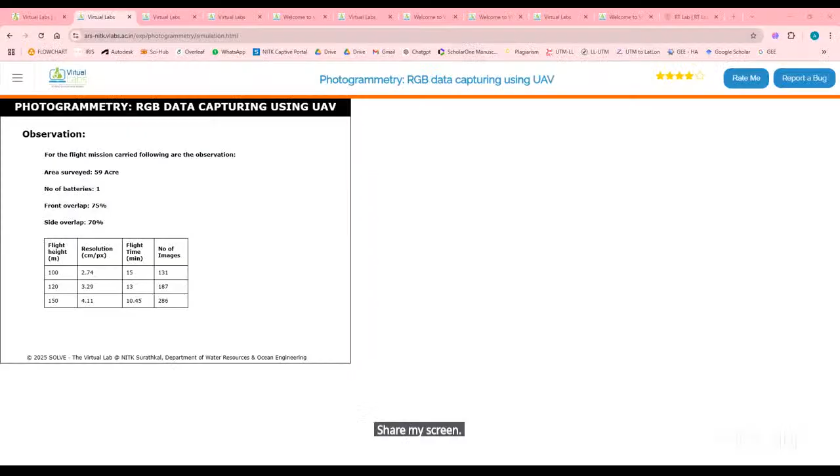So yes, going back to civil engineering, and I think it's in fluid mechanics itself. Moving directly to the list of experiments, we have impact of jet.

In this experiment, we have three options: flat vane, hemispherical vane, and inclined vane. Let's take any one and move forward.

Now we'll move the counterbalance weight to make the arm horizontal. We'll look at the bubble and make the arm horizontal. Once the balance is made, the length and weight of the counterbalance distance are measured using a scale. So now we have to measure the A distance and the B distance, and from that we'll be placing our weights.

Then we'll allow the water to flow in. Again we'll make our arm horizontal and move on to the next step. Now this jet is being directly applied to a flat vane.

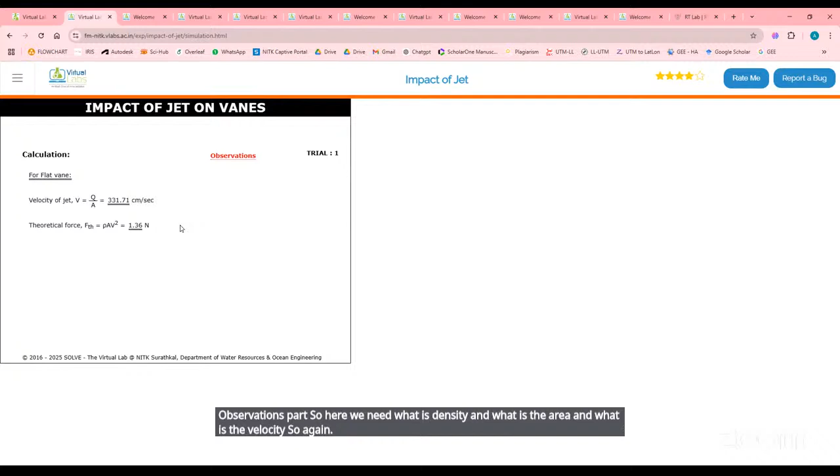Did some mistake there? Okay. So we can find out the coefficient of impact by F actual divided by F theoretical. That is 1.1445 divided by 1.36, which comes out to be 0.84.

Similarly, we have trial 2 and trial 3, but the procedure is completely the same. I think that's sufficient.